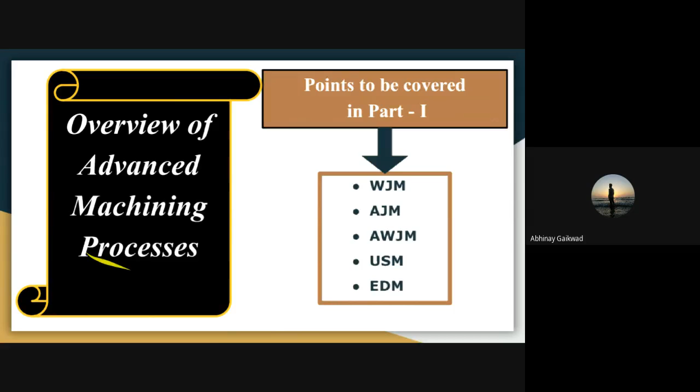Keeping this destructive phenomena in view, I will ask one question to all of you: could you think of making this destructive phenomenon useful, or for developing new technology?

This is just the example we observe in our daily life, for our daily events. So this destructive phenomenon we have to apply for the advancement of our machining processes. I am saying this is a destructive phenomenon, but you have to use or apply this destructive phenomenon for a constructive purpose.

Constructive purpose means, thinking from the technical view, for some constructive purpose people started thinking, and they took inspiration from this destructive phenomenon and developed a process called water jet machining. What people did is take this destructive phenomenon and develop a constructive solution for a constructive purpose, and this process is called water jet machining.

In simple language, what we have to do is strike or impinge water on the workpiece with high velocity, and due to the kinetic energy of that water, material removal will happen from the workpiece material. Now how does that material removal happen? It happens due to the erosion of the material, workpiece erosion, which starts due to the impact, or due to the kinetic energy of the high jet velocity of water.

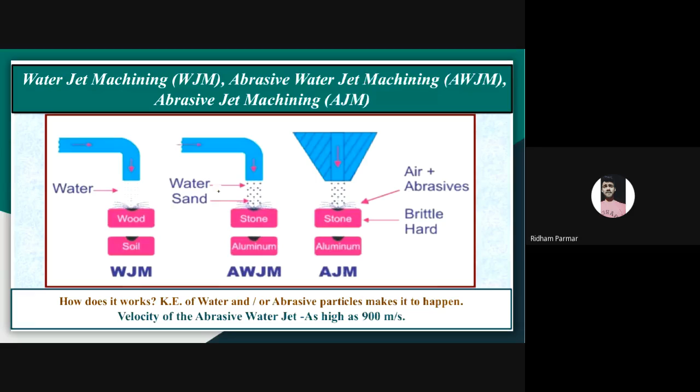Now, in the same way, in the rainy season, if you see water coming out of the tap, you will find some sand particles are mixed with that water. Here water is coming through this tap, and in that water, due to the rain, small sand particles are also mixed.

Now once again, I will take a workpiece which is made up of stone, and I will put it under this tap. Through this tap, water mixed with sand comes out, and you will get that fluid jet. I say fluid jet because here I consider it a mixture of water and sand particles. Now the sand particles along with the jet will come and strike the stone.

Then after a few days or a few months, what will happen? Can you guess? Will the stone surface remain the same, or plain, or due to the impact of water plus sand particles, will small craters form on that surface? What will happen? Pranay?

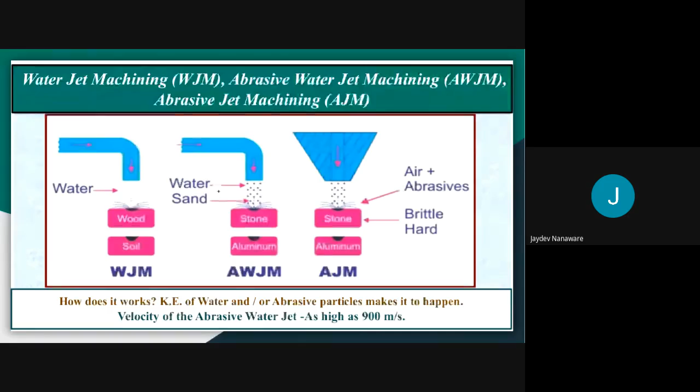And please write down that the velocity of the abrasive water jet is as high as 900 meters per second. Here at the bottom I have written that statement. How does it work for these 3 processes? For water jet machining, kinetic energy of water is used. For AWJM, kinetic energy of water and abrasive particles is used. And for AJM, kinetic energy of abrasive particles is used.

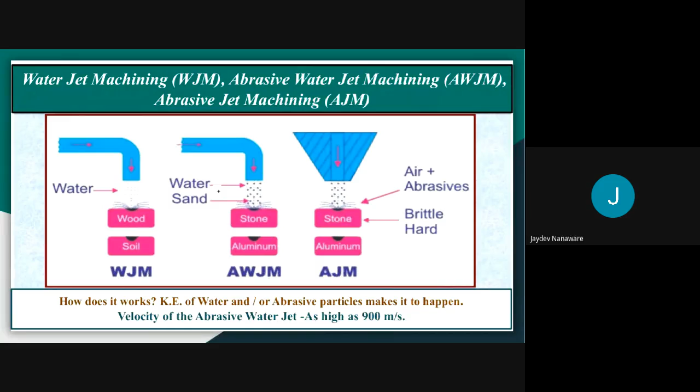Now in AJM, air will act just as a carrier gas for the abrasive particles. You will come to know that during our next lecture, because in the next lecture I will start AJM. Don't worry. Okay, shall we proceed further? Yes, sir. Okay.

Now we'll go for another advanced machining process which belongs to the mechanical energy based processes, that is ultrasonic machining. This ultrasonic machining also belongs to the mechanical energy based processes. How it belongs to mechanical, that concept I will explain here, don't worry.

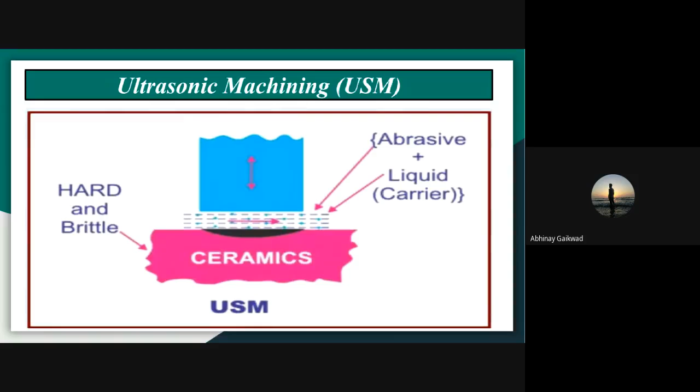Now there is another process called electric discharge machining. This electric discharge machining belongs to the electrical energy based processes. Now let us see. First I will explain how it evolved, so we'll go for the history or background of this process. Now there were two brothers.

Now they observed that some metal had been removed from the male as well as the female parts. They observed that some material had been removed, and then both Lazarenko brothers started thinking about how to make use of this destructive phenomenon of sparking for some constructive purpose.

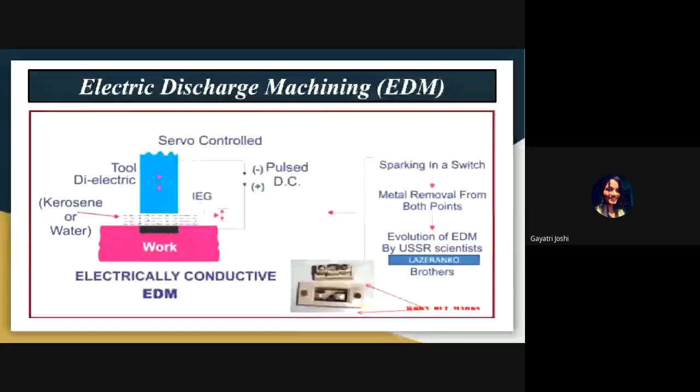Okay, shall we move forward further? Yes, sir. Okay.

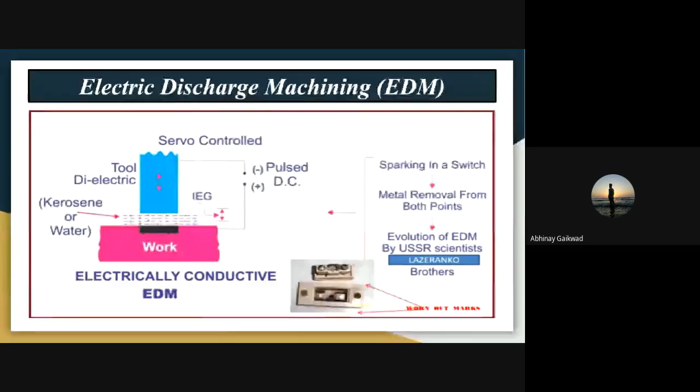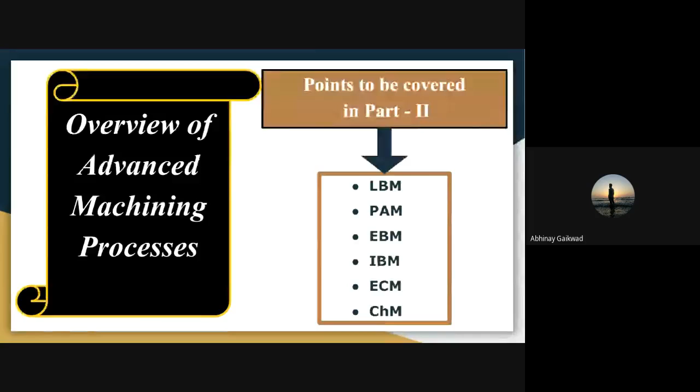Now we'll start part number 2 of our overview of non-conventional machining processes. Now this is another interesting thing, that is laser beam machining. Again, for this laser beam machining, I will take the example, the interesting thing which all of us in our childhood performed as an experiment. This concept we were looking at as magic during our childhood. So what will we do?

We were taking a lens, correct? So in this figure I will show you this is a lens. Then we are trying to concentrate the sun rays through this lens.

And after some time, what you will observe? Burning will happen, and that experiment we were enjoying as a magic. That burning of the piece of paper using lens, by concentrating the sun rays through that lens on the workpiece, after some time that piece of paper is going to burn, and that we were saying as magic. But that is not magic. That is one of the destructive phenomena.

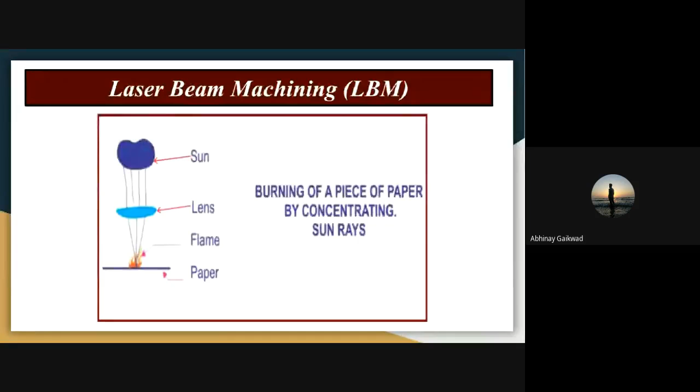Now similar kind of concept, researchers have utilized for constructive purposes. In this second diagram, in case of laser beam machining, you are concentrating the laser light. Instead of the sun rays, we take the laser light or laser beam. Through this laser gun you take the laser beam, and through this lens, having a very small portion, you can pass the laser beam on the workpiece. Same concept.

Now where you are going to pass this laser beam? Where you want to remove the material, on that surface only you have to pass the laser beam.

Through this laser beam, when passing through the lens on this particular portion of the workpiece, due to the high heat intensity of this laser beam or laser light, melting and vaporization will start, and due to that melting and vaporization, material removal will happen from this workpiece.

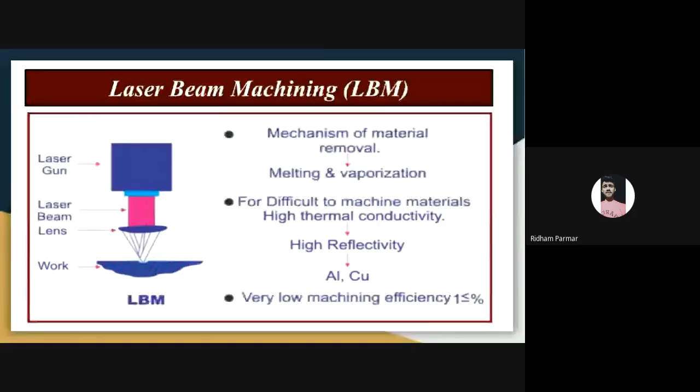Now let us move to the next one. There is plasma arc machining, another process called plasma arc machining. Now laser beam machining and plasma arc machining, electron beam machining and ion beam machining, these belong to thermoelectric or thermal energy based processes. Now I will give an explanation about plasma arc machining.

Now in this particular figure, as you can see here, we have the gas, which is coming in, and it is connected to the electrode. Now here you can see this is the electrode, and from this we are passing the gas.

Now this electrode is connected to the negative terminal of your DC supply, and here is the workpiece, connected to the positive terminal of your DC supply. Then we apply a very high potential between this positive and negative, or I can say between this electrode and the workpiece material.

When this gas comes, an arc is formed, and the gas gets ionized and plasma is formed. This plasma has a very high heat intensity, and you can cut any material due to that very high intensity plasma.

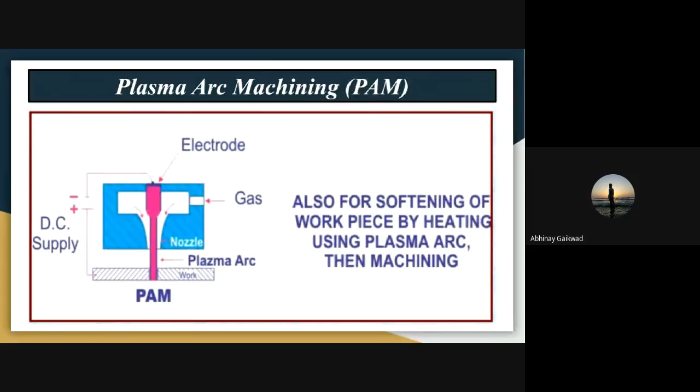Next one, another process belonging again to thermoelectric or electric energy based non-conventional machining processes: electron beam machining. This is again a very interesting process, electron beam.

I have already shown some examples of where we need this, for the machining of small micro holes.

Here you can see we have the electromagnetic lens, and we also have the beam control coil. So here electromagnetic lens, then electron control coils, the beam control coils, are there.

Then you can see here this is the electron beam, with electrons in this particular beam, the electron beam.

This electron beam moves at a velocity close to the velocity of light. When such a high velocity electron, although it has negligible mass, moves at a velocity close to light, the kinetic energy, half mv squared, becomes so large that this electron beam creates a very high temperature. At the point where this electron beam hits the workpiece, the temperature goes very high, and due to that temperature, machining or material removal happens.

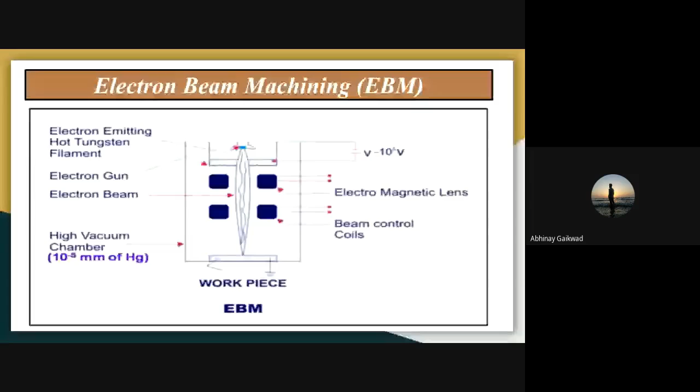Now this focused ion beam, sputtering off or knocking out of atoms from the workpiece surface will happen by the kinetic momentum transfer from the incident ion to the target atoms. So you can see here, sputtering of atoms will happen from that workpiece surface.

Now this sputtering, or knocking out of atoms from the workpiece surface by the kinetic momentum transfer from the incident ion to the target atoms, takes place, and I will explain it here with the help of this figure. You can see this ion of some gas coming and hitting the top surface of your workpiece, and you can see here it has displacement. After hitting, this ion is going to displace from that particular point, and you can see here the atoms which are displaced.

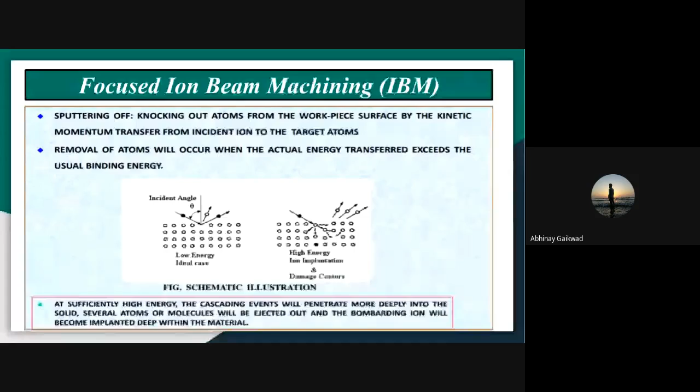Now we'll start the last part of this overview, where we'll cover electrochemical machining and chemical machining.

Now you may be knowing about the plating, electroplating concept from chemistry class. This electrochemical machining is just the reverse of electroplating. You can take the example of the tool. You have the tool, and actually this tool and workpiece both are electrical conductors.

This we will discuss later on. When electrolyte is flowing in between, in this gap, between the tool and workpiece gap, after flowing that electrolyte, you connect this tool to the negative terminal of the DC supply, and you connect the workpiece to the positive terminal of the DC supply. Then current will start flowing in between this gap. This gap is known as the inter-electrode gap, already I have told you, inter-electrode gap.

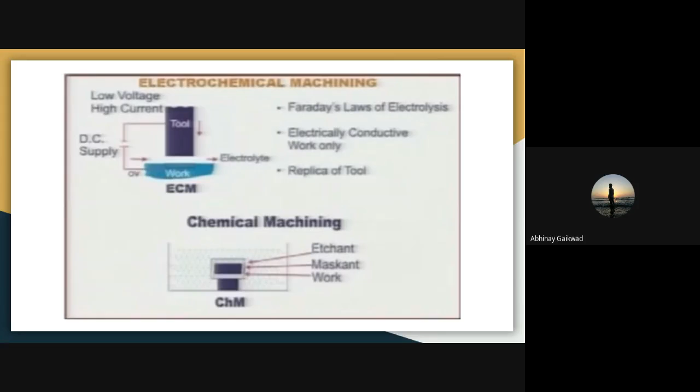During conventional machining, the chemical properties or the mechanical or metallic properties are the barriers in our conventional machining. So here there is no barrier about the properties. Okay, understood this electrochemical machining? Say yes or no, somebody. Yes, sir.

Okay, now we'll go for the next one. Again, very interesting. There is another process called chemical machining, or sometimes we call it chemical milling. So in this process, we are using the etchant, which reacts chemically with your workpiece surface. Etchant means what? A chemical acid, which is used for removing the material from your work surface.

So how is the workpiece material going to be removed? Due to the chemical reaction. To do that chemical reaction, we require the etchant, which reacts chemically with your workpiece surface, and we are also going to use a maskant. For what purpose? To hide the surface from where we do not want to remove the material. And you can immerse, dip, or submerge that workpiece in the etchant, with the maskant already applied.

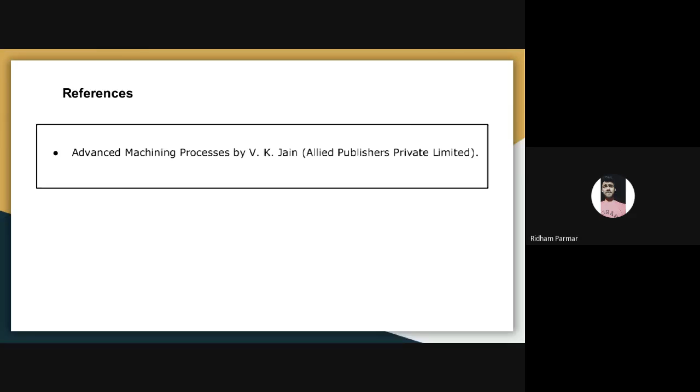Up till now we have covered all the processes we are going to cover in the next 4 chapters. For whatever theory, diagrams, or concepts I have delivered in this lecture, I have taken the reference of the Advanced Machining Processes book by V.K. Jain. So this is the overview of advanced machining processes, or non-conventional machining processes.

Okay. So in my lecture, I started with conventional machining and non-conventional machining, but this part I have already covered, so we should not invest our time on that point. So directly I will move toward the various similarities between conventional machining and non-conventional machining, because up till now we have gone through all the introduction about conventional and non-conventional.

So if you talk about the similarities between these two, the first point is that both are machining processes, because under manufacturing processes we have the metal removal processes. So both are machining processes and both are used for the removal of the excess material. Then both are subtractive manufacturing processes. A top-down approach is used.

Then, as already discussed, both conventional and non-conventional machining are secondary manufacturing processes, and importantly, both can produce sufficiently smooth and finished surfaces with closer tolerance, although different processes have different capability. Due to the limitations of conventional machining, we are moving towards non-conventional machining. So these are the few similarities between conventional and non-conventional.

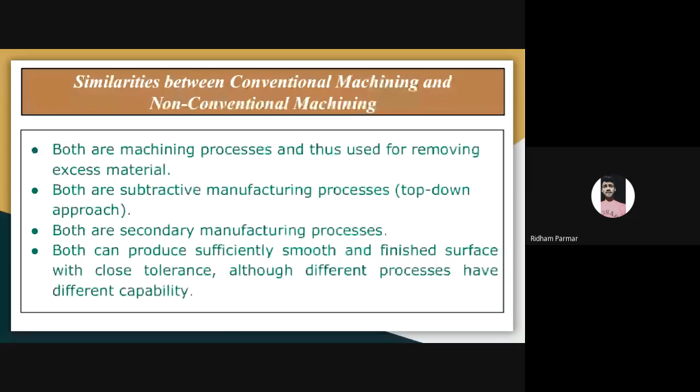Now let us move to the important point, that is the difference or comparison between conventional machining and non-conventional machining. So here I have made two columns. In the first column you will get the points regarding conventional. In the second column you will get the points regarding non-conventional. All these points I have already explained during my last lecture in main characteristics. So the same points are there, but here in a different format.

So in conventional machining, only mechanical energy or mechanical power is utilized to gradually remove the excess material from the workpiece. Only mechanical energy is used. But in the case of non-conventional machining, various forms of energy are used. Various forms of energy means what? Chemical energy, electrical energy, mechanical, light also, or a combination of two or more such forms are directly utilized for the removal of the excess material.

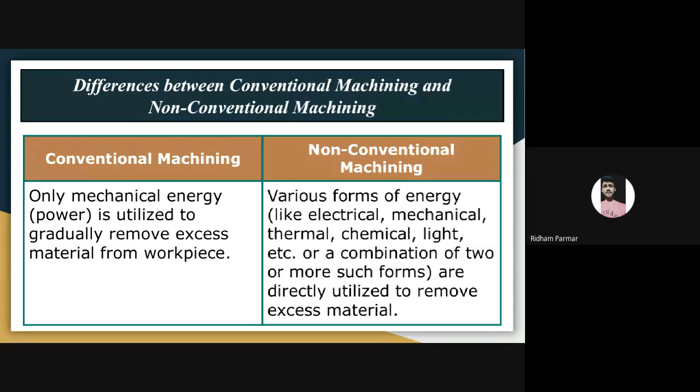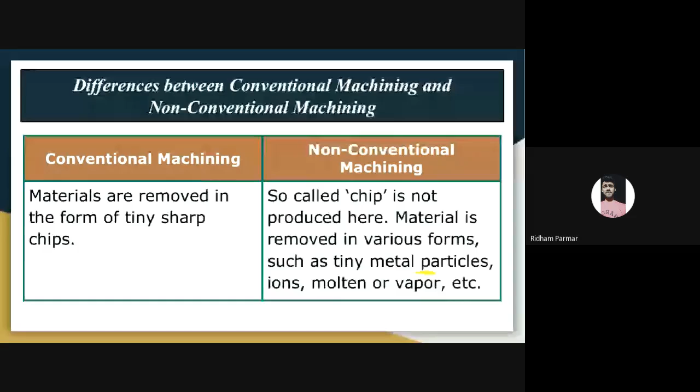Then in conventional machining, materials are removed in the form of tiny sharp chips. But in the case of non-conventional machining, the so-called chip is not produced. Material is removed in various forms such as tiny metal particles, ions, or molten or vapor. Then in conventional machining, shear deformation is the only phenomenon that causes the removal of material. So shear deformation means what? Using your sharp-edged cutting tool, with physical contact between tool and workpiece, you are applying the force, that is shear deformation.

But in most non-conventional machining processes, shear deformation plays an insignificant role in material removal. So instead of shear deformation, in non-conventional machining we have erosion, chemical dissolution, evaporation, sputtering, etc.

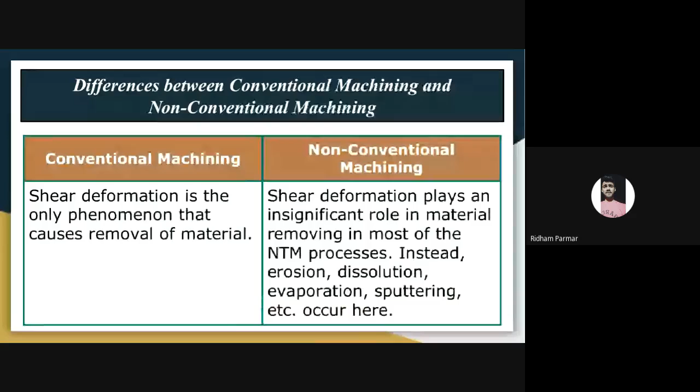In conventional machining, we are using a sharp-edged cutting tool having specific geometry, material, and properties required for the cutting action. But in non-conventional machining, the so-called cutting tool does not exist. However, in a few cases, for example electrochemical machining or electric discharge machining, a tool is required, but by keeping the interelectrode gap, and its profile and property must match the requirement.

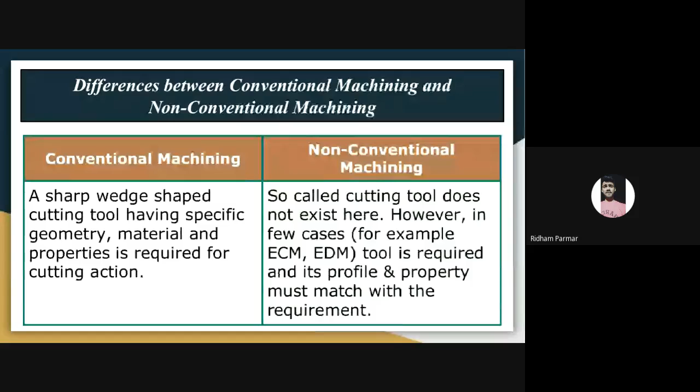That is the basic condition. Then in conventional machining, physical contact between the cutting tool and workpiece, and also the relative velocity between them, are indispensably necessary in order to remove the material. In non-conventional machining, no physical contact occurs between the tool and workpiece, although in a few processes such as abrasive jet machining, abrasive water jet machining, or ultrasonic machining, solid abrasive grits, meaning small particles, strike the workpiece surface to erode the material.

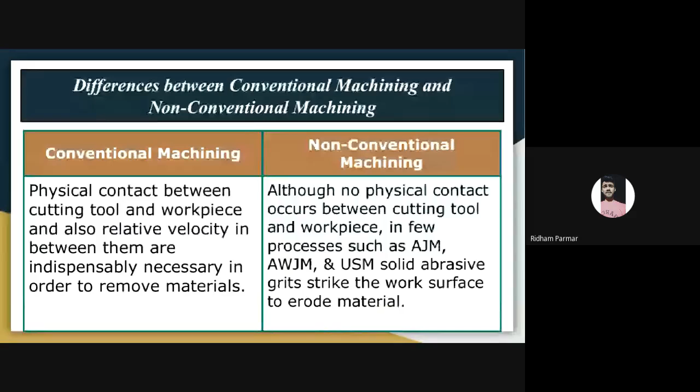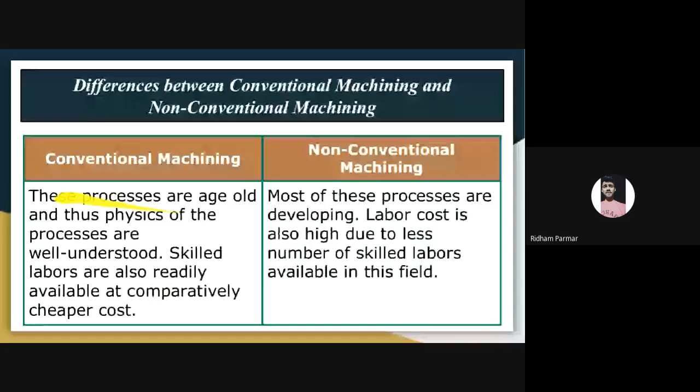Now conventional machining, these processes are age old, and thus the physics of these processes are well known to us all. So labor is also readily available at comparatively cheaper cost. Okay, this is a general point. But in case of non-conventional machining, achievable surface finish is much better than that of conventional processes. So in case of non-conventional machining, most of the processes are developing. So labor cost is also high due to the less number of skilled labor available in the field.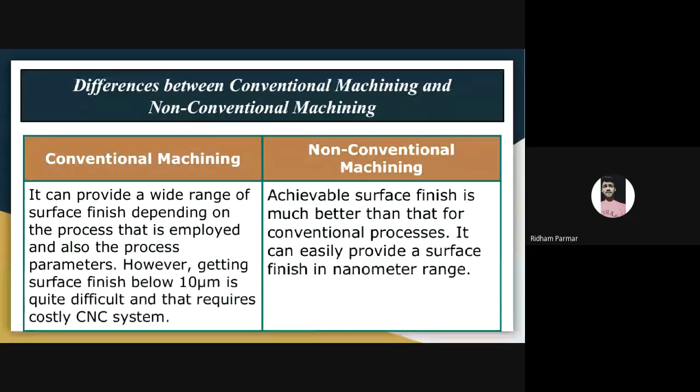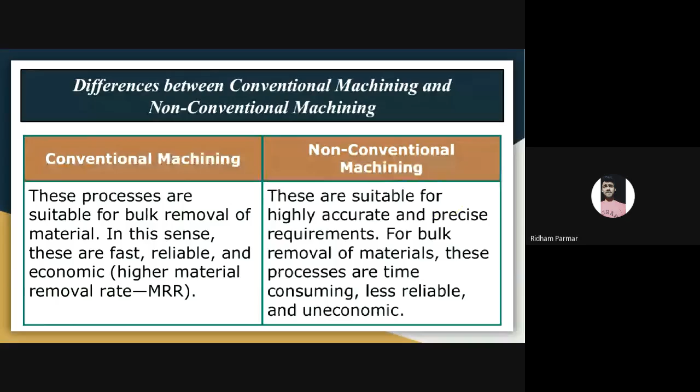Okay, so conventional machining processes are suitable for bulk removal of material. In this sense, these are fast, reliable, and economic. That means a higher removal rate we will get. But non-conventional machining processes are suitable for highly accurate and precise requirements. For bulk removal of materials, these processes are time consuming, less reliable and uneconomic.

So, in case of conventional machining, there are certain shapes that cannot be produced, because as we know there is a limitation of conventional machining, that is, to machine a complex shape or intricate geometry is difficult. But non-conventional machining processes sometimes become a reliable option for producing complex shapes and intricate sizes and shapes.

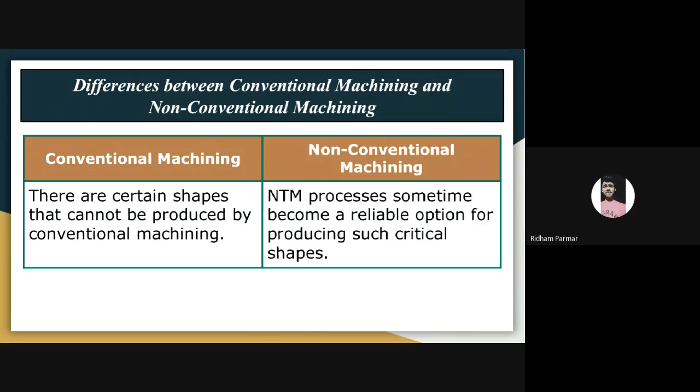Okay. The last is the examples of conventional machining. As we know, turning, facing, grooving, drilling, boring, reaming, shaping, planing, then milling, honing, lapping, grinding. These are the examples of conventional machining.

And the examples of non-traditional, non-conventional machining are abrasive jet machining, water jet machining, abrasive water jet machining, ultrasonic machining, electric discharge machining, electrochemical machining, chemical machining, plasma arc machining, electron beam machining, laser beam machining, ion beam machining, or I can say hybridization of the above processes. Hybridization means combination of two or more of these processes. That is called hybridization. Okay, that is not part of our syllabus.

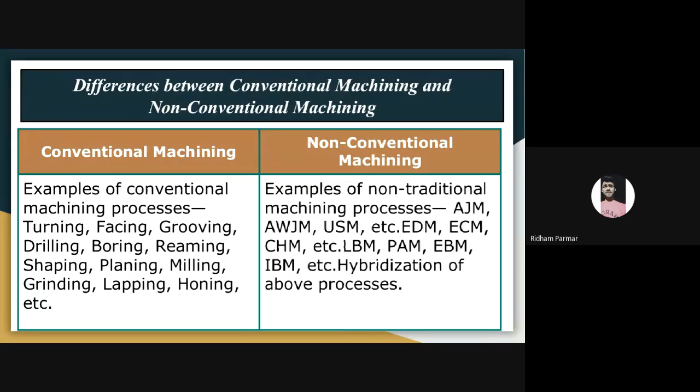Have you got what I taught today? Yes, sir. Okay, understood. As only 30 students are there, I will take attendance by taking the roll numbers of present students only. Today is 26. One by one, you can tell your roll number. B10, B26, B22, B23, B11, B27. Please, after giving your roll number, mute yourself. B47, B17, B41, B16, B31, B2, B37, B20, B1, B3, B15, B54.